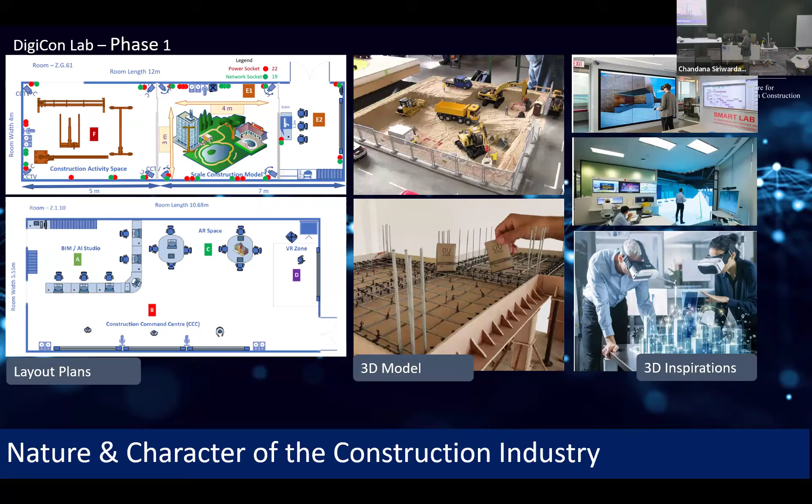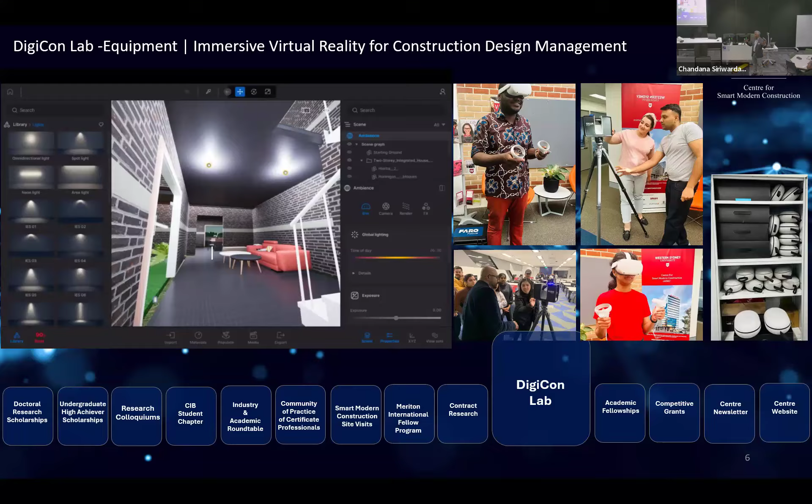Within the laboratory, we have virtual reality, image scanning using LiDAR scanners and other various scanners, photogrammetry, and various technologies that we use to capture construction-related images and then use that for training purposes, as well as use it for monitoring progress, integrating with building information modeling, and so on.

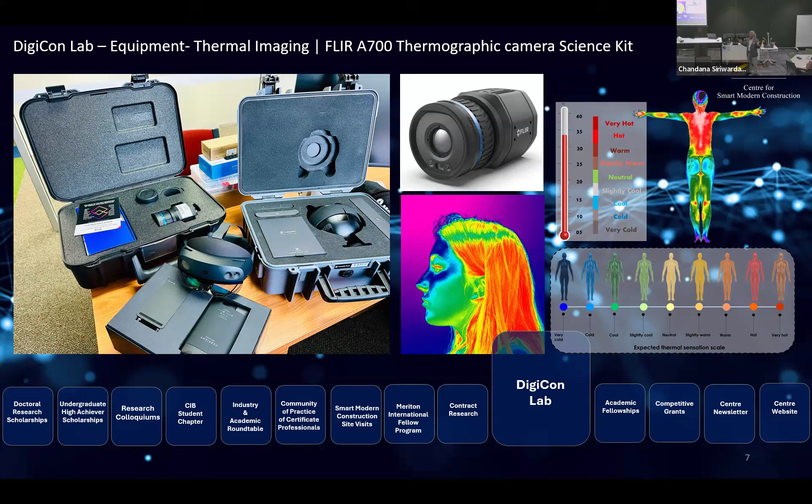We've got very sophisticated thermal image processing cameras, from which we are working on recognizing the thermal image conditions within common environments. There's a PhD project that we are working on, which I will briefly explain as we come along.

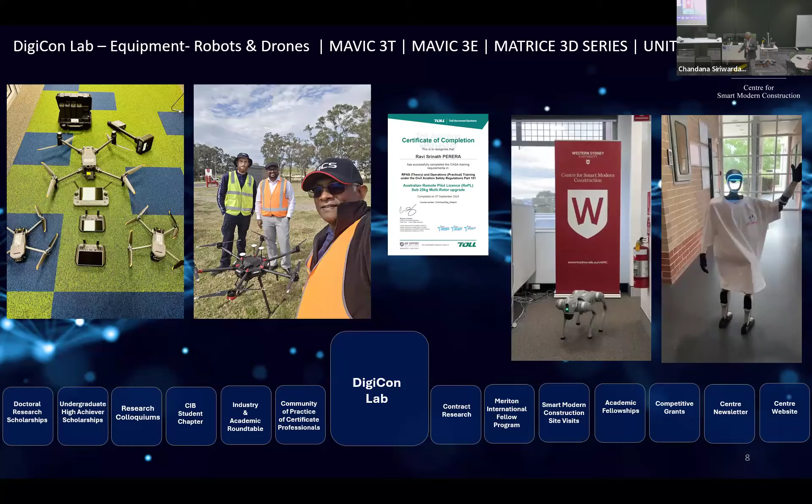These are some of our humanoid robots and the robot dogs that we have for these activities.

Coming on specifically to my pitch today about digitalization in construction, we need to understand what construction is, and why it is different. So this is what I would always talk about.

I start here. The construction sector has unique characteristics: size and complexity, we are massive in any country. It contributes 7 to 11% direct contribution to the economy. Likewise, the indirect impact is massive.

Construction, as opposed to manufacturing or many other industries, produces a product that stays where it is produced, in comparison to running in a production line. So it is constructed on site, one-off design. It's fragmented because there are many specializations involved due to the complexities involved.

And the ease of entry and exit to the construction sector is what we see. When construction booms, you see so many construction companies, and then the bust cycle comes in, you see many go bust and then out of the construction sector. So this cyclical nature comes because it's a low profit, high turnover industry comparatively to any other sector.

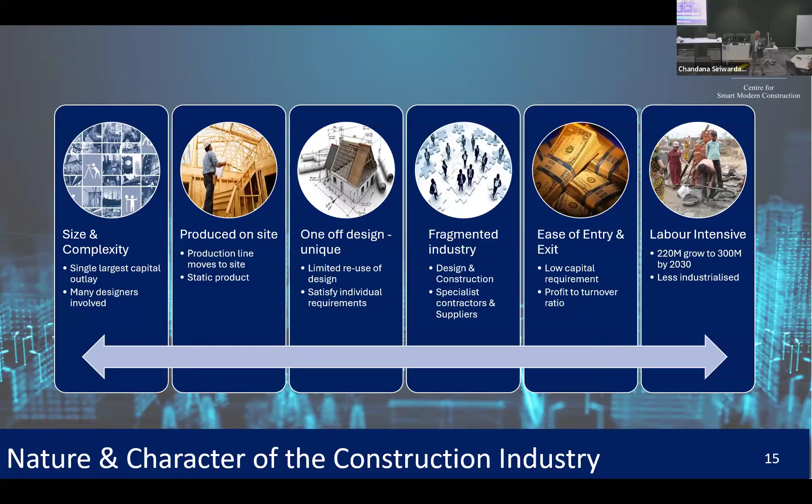It's because of these economic characteristics, and the low capital requirement for starting a construction company, that you see mushrooming of companies, and then again companies going into liquidation because of problems, supply chain issues, and the complexities involved, which we will explore as we go along. And it is a labor-intensive sector comparatively as well.

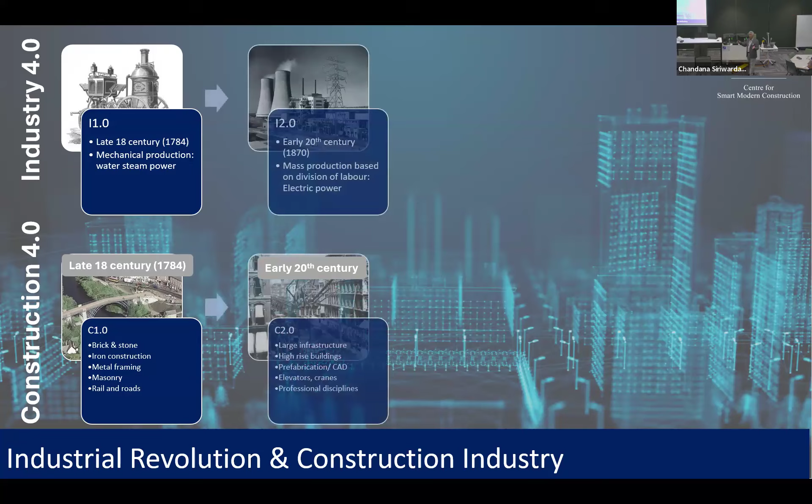So these are the things that make the sector unique, and therefore whatever we do has implications. Today we are looking at more digital aspects. For that, I need to take you through the industrial revolutions that have happened over the years.

So in the 1700s, we had the first industrial revolution with steam engines coming on board. And then we had the industrial revolution where electricity came about. And then, then we had in the early 70s the IT revolution.

When I started doing my PhD, which Chandana alluded to a little bit, I started in '93, finished in '97, and did a PhD on AI. So that's the time period.

AI started even 10, 15 years before I started. People only hear about it now, but it has a long history, and we have come to this level. Most of you have been using AI without knowing it. For example, smartphones, you have text prediction when you type - that's AI working underneath, but you didn't know it was AI, probably until now.

But the current AI generation comes about because of the large language models and the consequent generative AI coming on board, making it more publicly accessible, useful things like the GPTs that you can work with and that give you solutions.

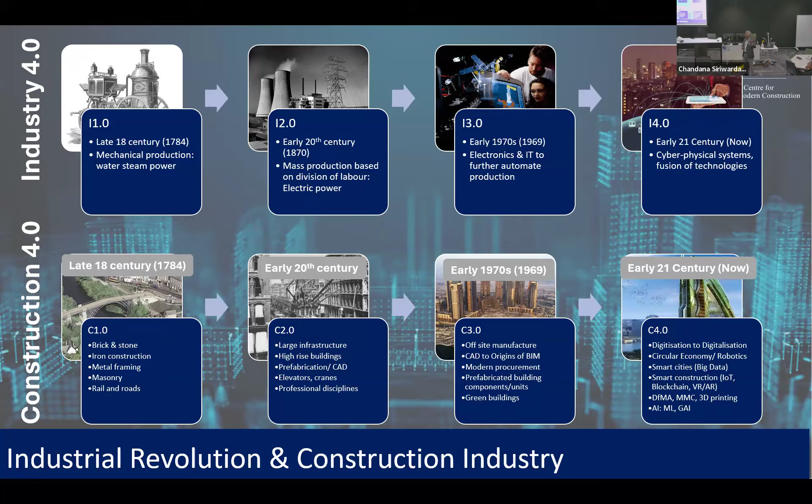And now we are about to enter the fifth industrial revolution as well. So what this means is the pace of technology development is rapidly advancing - it's an exponential curve. So things in the next 5 years will change dramatically. You have seen the advancement of smartphones and how that and the internet changed our lives. It would be 100 times faster than that with the AI advancements and so on that is happening.

So the construction sector is still the second least digitalized sector globally.

Construction is probably the second least digitalized sector, maybe the least now, since agriculture is digitalizing rapidly. So we have a lot to do. We identified that the construction sector has a policy deficiency.

Without policy impetus, you can't make the sector adopt digitalization. So we were funded by the Australian Public Policy Institute to come up with a digitalization policy framework, which resulted in this work. If you visit digicon.au, it's a live website, you'll see our work, and this is the resultant report. I have a few copies here to hand over, and there's a complementary policy-related report as well. That work identified how we can digitalize the construction sector and make it move faster in the digitalization process.

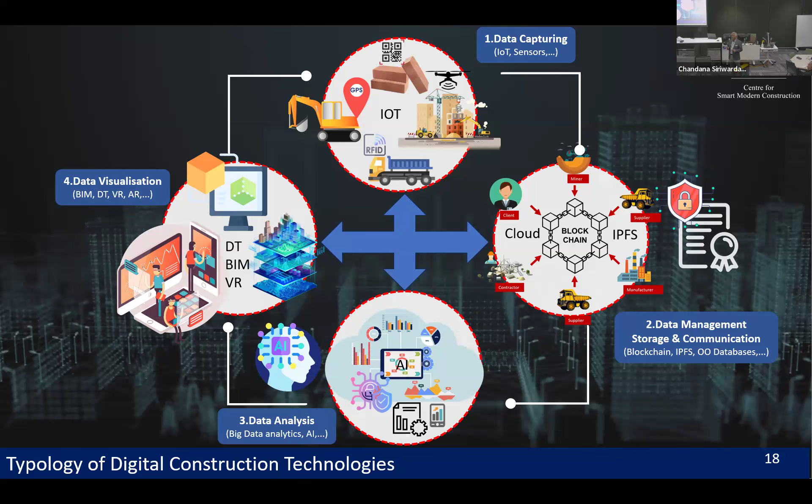Now, why I talked about this is that we do these type of outcomes or calculations. Embodied carbon - you probably know about carbon emissions - we need to know how much embodied carbon, operational carbon. We also work on embodied water as research. You may have heard about circular economy, and ESG calculations. In Australia now, companies over 50 million turnover have to report on ESG - reporting is mandatory for those companies. Carbon trading, EPDs, environmental product declarations - these are all important elements for sustainability.

Now, the point I was trying to make is all these estimates and predictions are based on static data. What do I mean by static data? Static data is data that you find in databases. And where do most of these data come from? Most of it originated at Bath University back in the 80s through a research project, and then it's been extrapolated, multiplied, and calculated from there, packaged into software, data books, and various other tools. It's all static data, and it's not accurate.

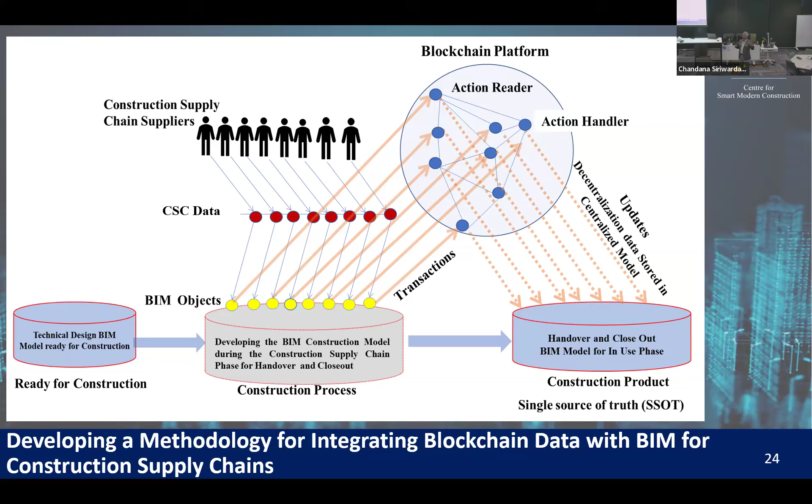This is a project we used for carbon estimating. As I mentioned earlier, we use blockchain to track carbon emissions. Now, this is real-time tracking, not based on database data. It is real-time emissions tracking through site data and getting that into the blockchain, and that will give us the actual emissions.

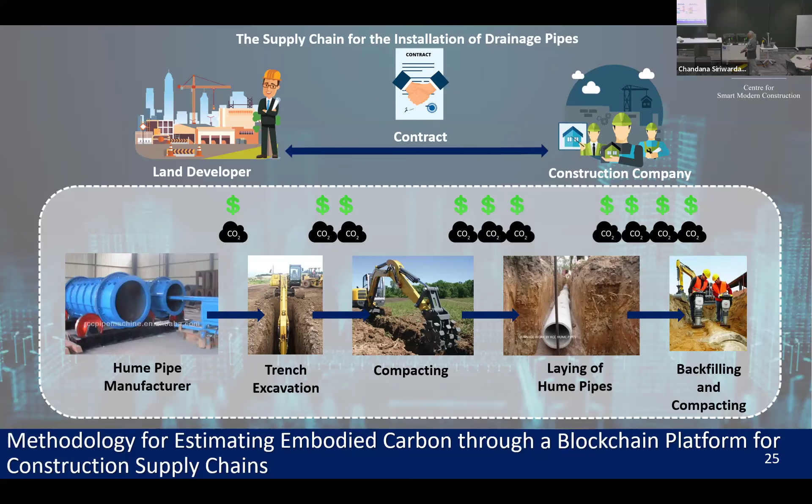This is another project where we're looking at embodied water. The concept of embodied water is the water used in construction, direct and indirect water usage. In the same way embodied carbon emissions are calculated, we can calculate embodied water usage.

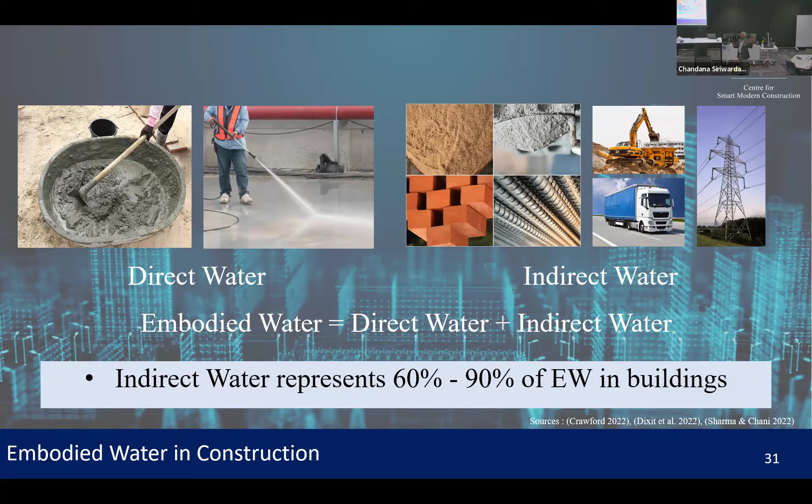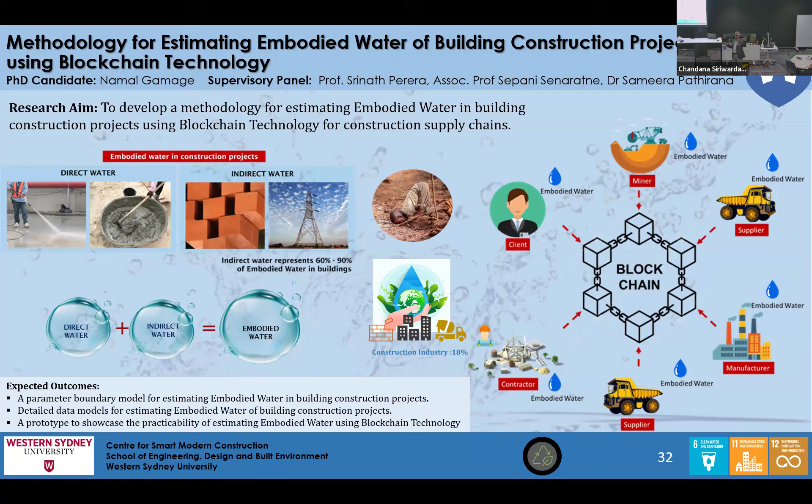Australia is a place where severe water shortages are there, and it's an important element for us to secure our water resources. That's something we are looking at here. That project uses, again, tracking transactions through blockchain and using that to estimate embodied water.

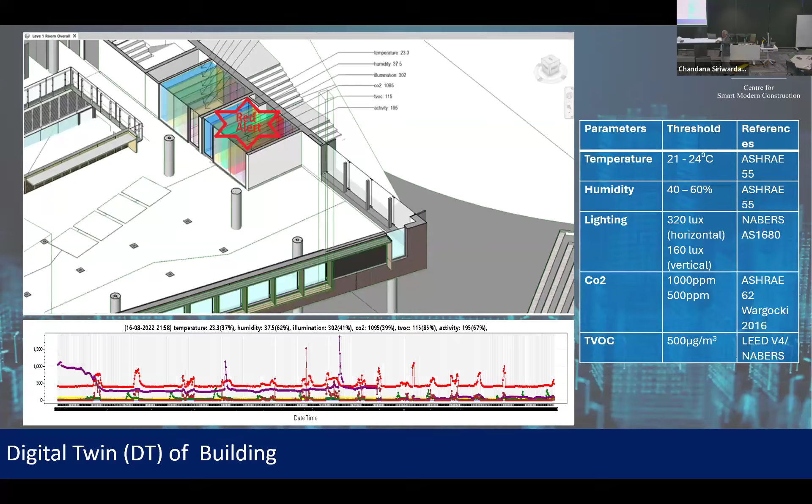In this project, we are looking at digital twin, basically integrating building information models with sensors to have a two-way digital twin, where things that change in the digital model are reflected in the physical model, and when various aspects of the physical model change, it is reflected back in the digital model.

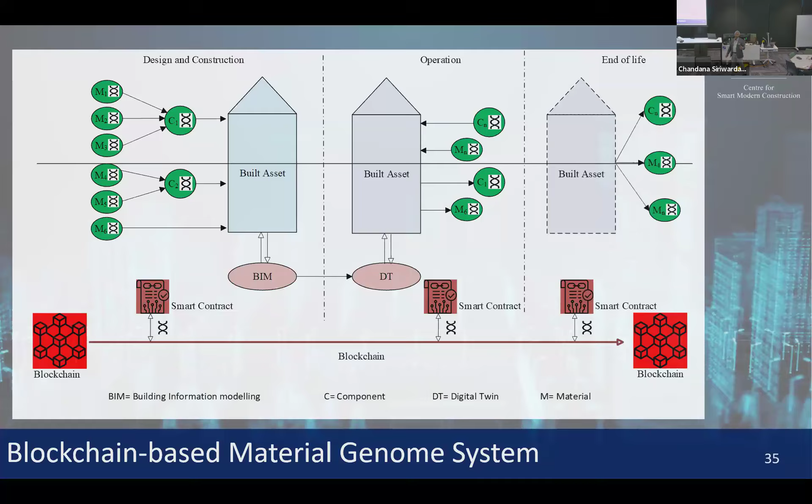We've created a carbon trading platform where carbon trading can happen. Any emissions that cannot be reduced will have to be traded, so that's where we are using carbon trading. That's the material passport project.

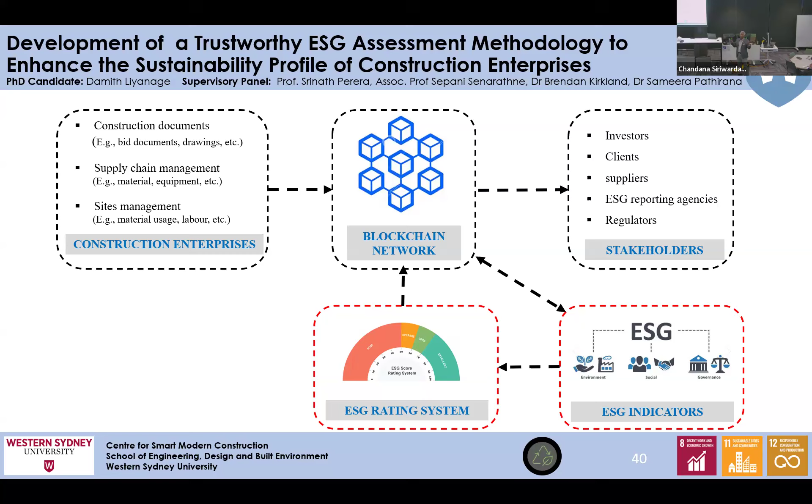Then in our other project, we are trying to capture ESG, environment, social, governance related data, and report it for construction companies. Again, we're using blockchain technology for that. We're also using these technologies.

This project is trying to see how, in a room like this, different people feel thermal comfort in different ways. It is because of various things. Somebody may feel cold, somebody may feel warm, and everything in between. How could you achieve optimum thermal comfort levels in rooms?

So we're using digital image capture to identify the thermal sensation of individuals and average it, using AI, to come up with a better thermal average for a particular room. So that's a more AI related project.

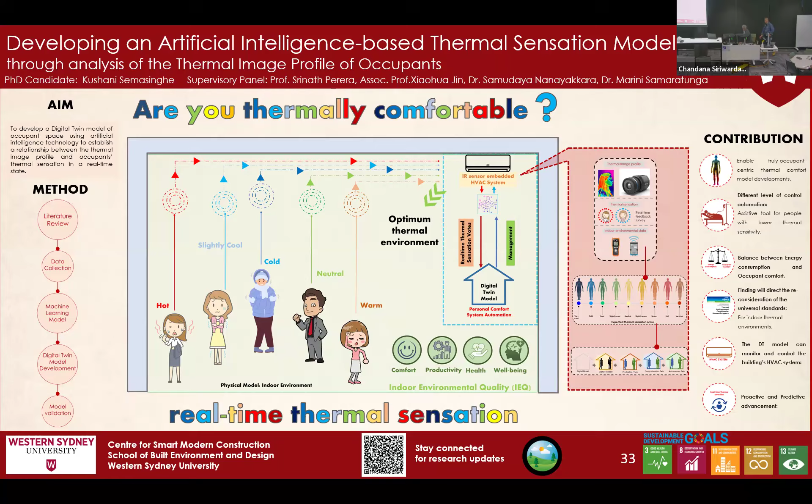So this is another AI project. This project is trying to avoid disputes proactively. So many communications happen in a project. If we can use the communication to predict the possibility of disputes and warn people about it, that will help us make sure there is intervention beforehand, and therefore prevent disputes happening.

So for this one, I have a small video to present if I have time. No? Yes. Okay. This one, right? Yeah.

Developing a dispute prediction digital system using machine learning. Conducted at the Center for Smart Modern Construction, Western Sydney University. Resolving disputes before they happen. Is it real or just hype? Let's take a closer look.

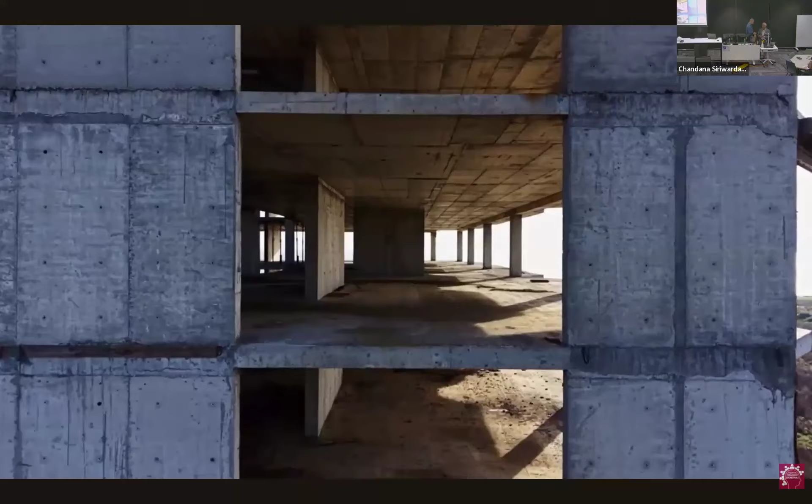The construction industry is under increasing pressure. Across the world, construction projects are experiencing significant cost overruns and prolonged delays. In severe cases, projects are abandoned and contractors become insolvent. One of the major reasons behind these challenges is disputes between parties to a contract. One construction dispute reached a value of $1.1 billion.

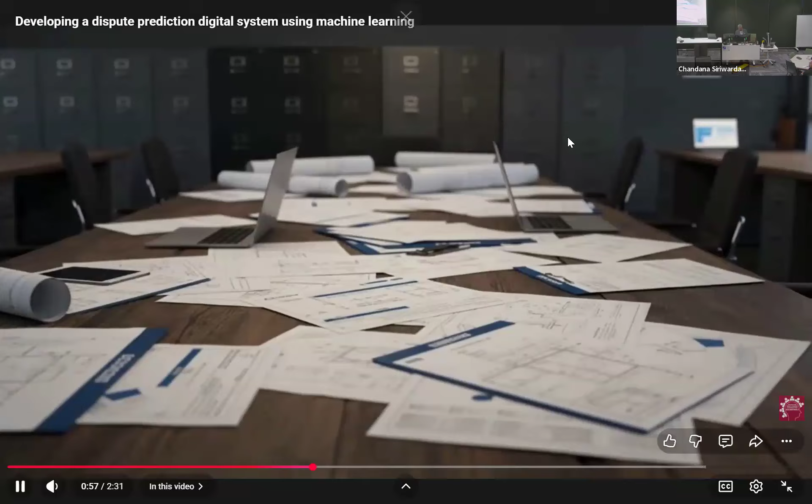Most of these disputes begin quietly in day-to-day information exchange between project parties. In practice, most construction disputes are closely associated with project documentation and formal communications. Documents such as emails, contracts, change orders, reports, meeting minutes, and site diaries often constitute the foundation of disagreements as they record cost and time entitlements, delay events, and daily site activities.

This study proposes an automated dispute prediction digital system that continuously scans your documents, your emails, your project communication, and warns you of potential disputes before you send them.

This is an email interface of a document management system integrated with dispute prediction models. As a project manager drafts an email about an overdue payment, the system automatically analyzes the content and provides a dispute alert before the message is sent. With one click, a dispute prediction report is generated.

The system shows a dispute index of 5, indicating a very high likelihood of dispute. This may lead to a payment and finance-related dispute, and key entities are also highlighted. Thus, the system alerts the construction professionals on the likelihood of dispute and the potential issues in the text before the project communications are exchanged. The results: reduced disputes, better business relationships, and successful projects at the end.

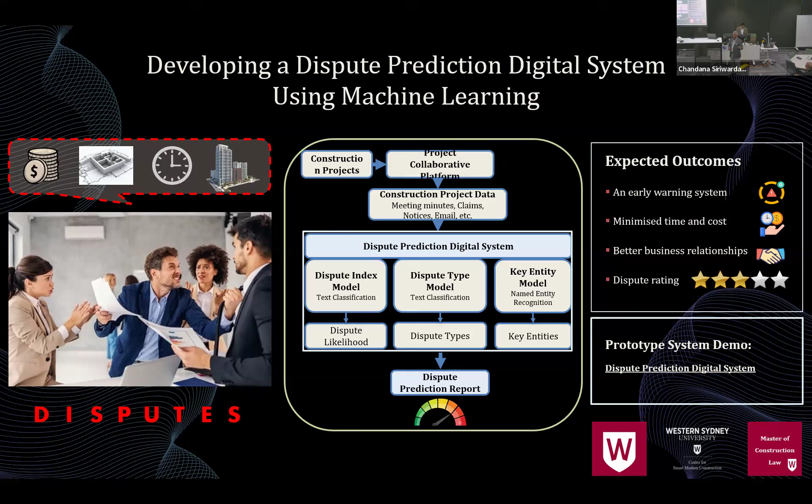So that basically gives you an understanding of how AI is being used. So we are using natural language processing, not the GPTs, but natural language processing algorithms to predict disputes. So we have an app. The app will capture all that information and prompt you when you're using emails about your communications and use of language. So then that helps in preventing disputes or warning about possibilities. And this can be used for minutes of meetings, project documentation, and all that.

So to conclude, just some of my publications that are involved, which we talk about most of these. Cost Studies of Buildings is, I shouldn't say myself, but it's quite a popular textbook in quantity surveying. Beginning of next year, we'll see the next edition of it. And then end of next year, we'll have the Contractual Procedures next edition coming in.

And the other book is basically a collaboration with Massey. So there's a few staff from Massey University who are leading that one. I'm a collaborator as well. Managing Information Technology Projects was another project that we brought about. This is our journal, which is a highly ranked journal in the construction and built environment area. So anyone interested, academics, you can use it as a publication avenue.

And finally, just wanted to give you a heads up about AUBEA 2026. In November, we are hosting the Australasian Universities Building Education Association's 49th conference at Western Sydney University, Parramatta campus. We'd like to invite you to come and join us, learn a bit more about what we do. It's an international conference where we're expecting over 200 participants, and you will have the opportunity to interact.

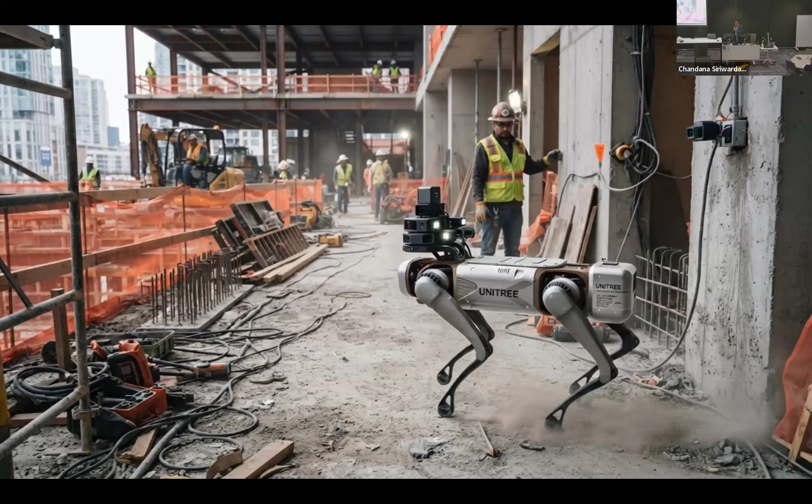There's a lot that we measure visually, right? So for instance, if you look at a construction site, you measure progress visually. You check for hazards visually. What else do you do visually? You do quality assurance visually. So there's a lot of visual information that we process, and we do that every single day in a construction site. And that's actually the best use case for platforms like this. Embodied artificial intelligence works best when you have that context, repeated processes. And so we just jumped the gun and purchased this robotic dog that we have at the moment.

But we know that it's not an easy step. So our team is looking at three things. We're looking at how to get the dog to autonomously navigate through the built environment, whether it's a construction site or a post-disaster scenario. We're also looking at the possible challenges and opportunities in actually deploying that in a construction site. It's a different thing just getting it to roam around a controlled site versus deploying it in a live site where you've got equipment and people moving around. And then we're also looking at prospective use cases, such as what I've explained before.

In addition to the visual sensing that the dog can offer, we can fit it with other sensors. So for instance, dust sensors, noise sensors, gas sensors. So you can imagine the possibilities. Chandana mentioned that we're not here to sell the robot, but right now we're exploring all these possibilities, and we're thankful to Massey University for supporting this first step.

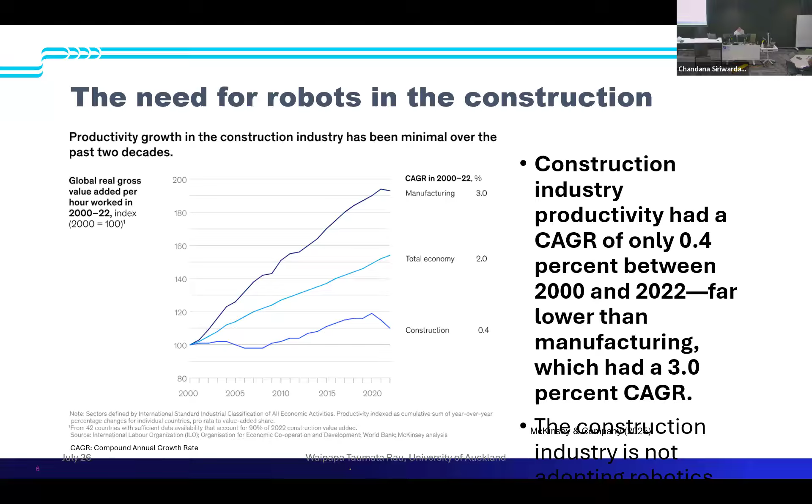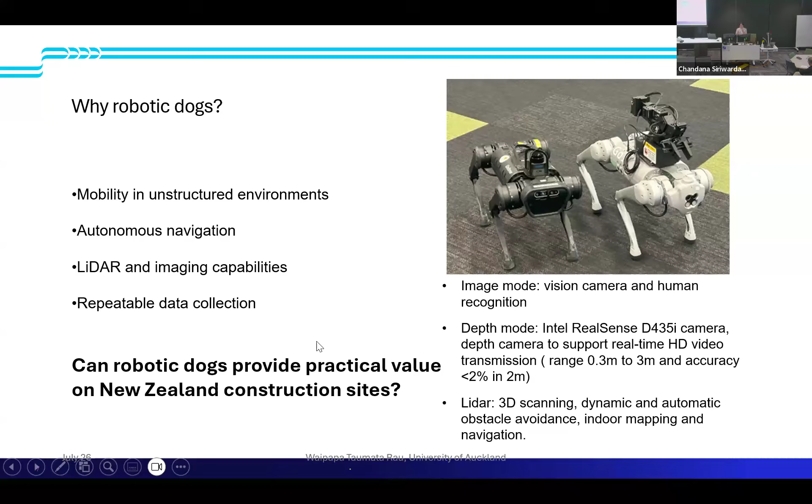So what it can do is that it can pick up things. It can remember what you have shown it before, and then it can copy it and do it again. So you can program it, right? And it has certain functions. I believe Napoleon and also Martin are gonna talk about what kind of technology it has later on. So I won't touch on this. So the next question will be, can robotic dogs provide practical value on New Zealand construction sites?

We've got industry people coming over saying they're quite interested in site monitoring digitalization. And from an academic point of view, we have our research needs: how do we get better, safer, and more consistent site data? After that, you need to design the research.

We have designed some assignments and also powerful projects for students. Since students will be the ones using those technologies, and know a little from classes, but in the end they'll use those technologies in the industry, we need to teach them. We also want them to touch and feel those different things, especially the robotic dog, and let them try them out. Then they'll feel, okay, I'm probably going to adopt that in the end.

Second thing: surveys and interviews on workforce or industry perceptions. What academic people think about it doesn't really mean industry people or construction workers think the same thing. So we need to collect their ideas or perspectives towards the new technologies. That's what we do. Next thing: technical validation of robotic dog data capture.

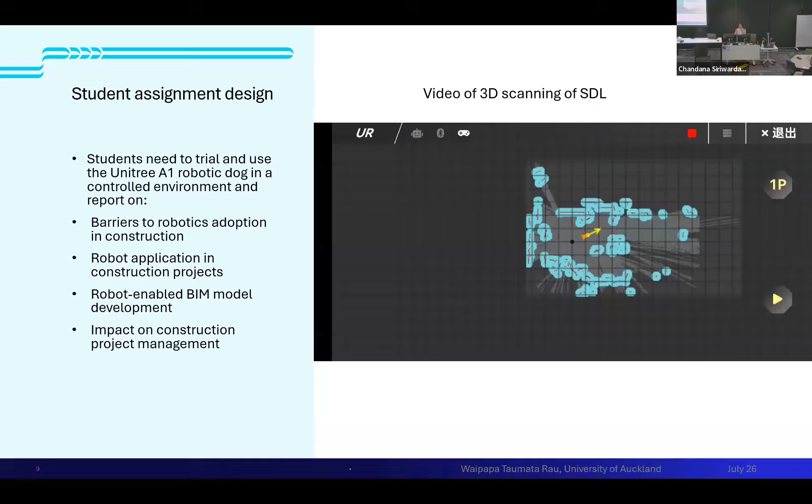I'm going to start this video. So what we need to do is not really to control the robotic dog to move backwards, forwards, left and right. The only thing I need to do is give it a direction, an arrow, and that's it. It can do the whole 3D scanning process by itself automatically. At the same time, it can also do autonomous obstacle avoidance, which means it can detect the surrounding environment in real time as it goes, and it will try to avoid any obstacles in front of it.

The Smart Digital Lab is a rectangular lab - that's the entrance, it should be a rectangular shape. It's not, because there are some students standing over there. We've also got a round table and some chairs around it. Here we have one student standing still all the time, and also another bicycle and a television over there.

I'm going to accelerate the whole process. You could probably see quite a lot of dots appeared and then disappeared - that's because some students really wanted to check if the autonomous obstacle avoidance is running.

So they want to see, for example, if I jump in front of the robotic dog, whether it can see me, recognize me, and try to avoid me or not. So it worked perfectly.

But because they are also master level students, they need to do research. So they also need to write a report on the barriers to robot adoption in construction, robot application in construction projects, and also robot-enabled BIM model development. I'm going to talk more about that in the next 2 slides. And also the impact on construction project management.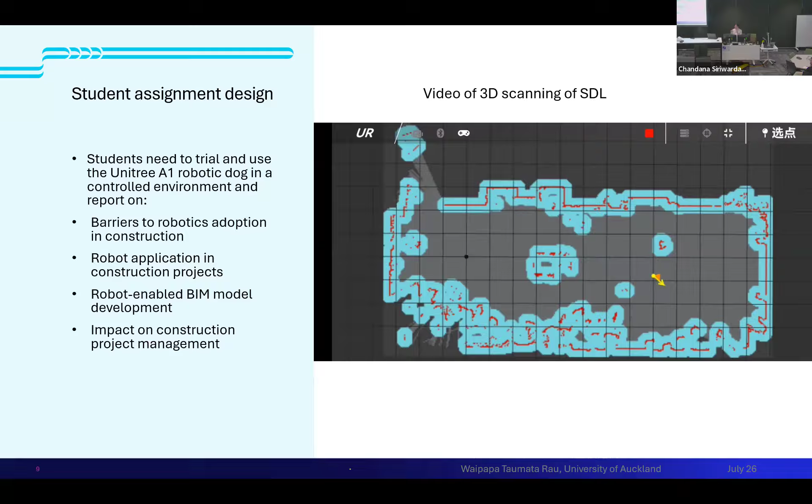So in the end, that's what we have got. That kind of project was done around 4 years ago, and we used the oldest version of the Unitree robotic dog. At that time, that whole video was shown actually on the app, and it's a pity that we can't extract data from it. We can only visualize the data. But because it's a 3D scanner, we know the results will be point clouds. So if we can get it out, that will be the input we can use later on, right?

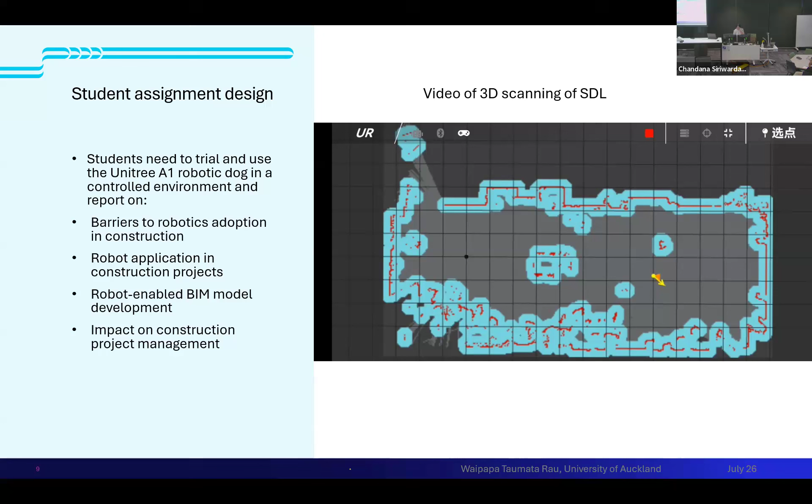Here is a case use for the automatic scan to BIM for indoor environments or indoor mapping for 3D scanner. I want to introduce the scan to BIM theory. I know some of you probably come from industry, you don't really know this quite well. But for the 3D scanner, we have different types, right? We have standalone ones, normally used, or a majority of you probably gonna use. But we also have got a handheld model. This one is extremely helpful if you use it under the table, if you think about it. And also mounted model, which means that 3D scanners are fixed on more like a stable kind of platform.

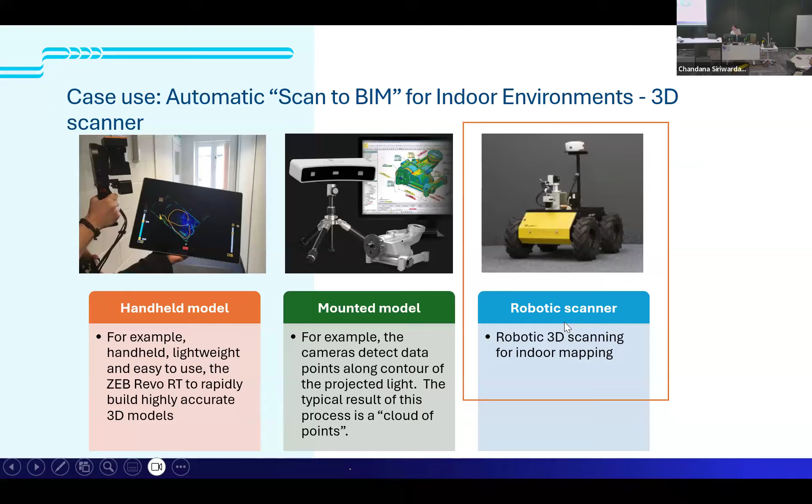But if you think about it, if we have got a robot with wheels or a robotic dog, so we can actually have the robotic scanner, right? And then how are we going to deal with that data?

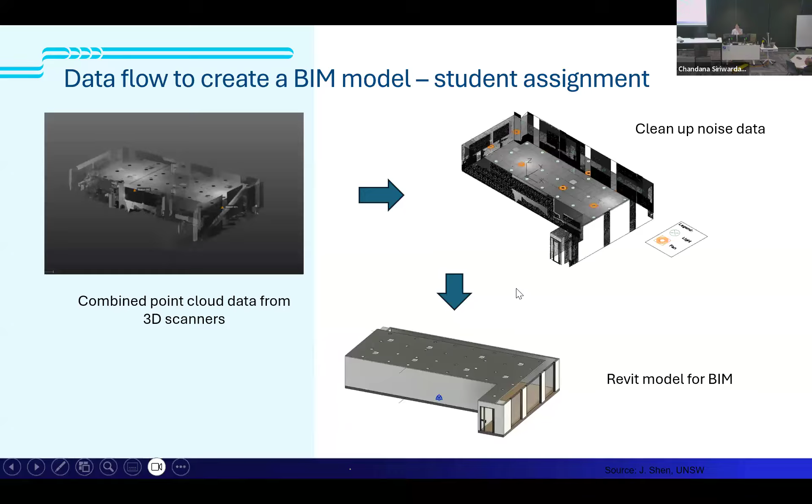We designed another assignment for the students. So if we do have 2 scanners or 2 robotic dogs, which can collect 2 sets of the point cloud data, then we can use some software to deal with it. For University of Auckland engineering students, we're lucky we have got the Trimble software. The Trimble people, they produce both the hardware and the software. So they produce both 3D scanners as well as the point cloud data executing software called Trimble RealWorks. The Trimble people have invested in the world's first Trimble technology lab at the University of Auckland, which means that all the university students, engineering students, can use this software for free. So they can actually combine those 2 different sets of point cloud data from the 2 3D scanners, and then they can clean up the noise data. Then they can form the Revit model, and that will be the input for the building information modeling. So that will complete the whole process.

Another one I want to talk about is the BRANZ-funded research, named de-risking the uptake of new technologies for effective change management. That was done by me, my PhD supervisor Alice John Richards, and also my colleague Jie. We worked with Victoria University of Wellington, and they have got a very big robotic arm in their lab. So they can do certain construction activities, for example, painting and also drilling, quite a lot of those. We also have got Callaghan Innovation people, Nick and Tim, come over. Thanks to Roy Davis for the lab coordination.

This is one of the case studies we have done before, taking the robotic dog to the construction site. This was done on September 8th, 2022 at the new Recreation Center of University of Auckland. It was the Hawkins construction site. So what we have done is demonstrate the Unitree A1 robotic dog in a more real-world environment on the real construction site. This is the first time we tried that on the real construction site for that dog. Also a questionnaire survey was designed to gather quantitative data and administered on site. We collected the workforce perceptions from 10 site workers from various roles. If you want to see the result, I can show you in the discussion panel.

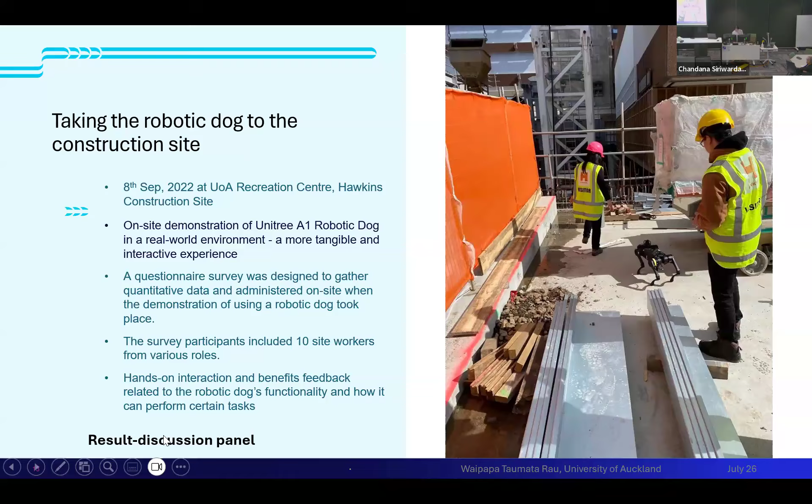I also supervised another group of students last year on the digital data collection infrastructure for construction progress monitoring. So the case study we did was to test and evaluate the effectiveness of the robotic dog data collection infrastructure for construction progress monitoring.

So what we did was use this robotic dog, the Go1. And I need to say that we have an agreement about it, so I can't really talk about the results they got, and I can't say which company it is, but I can describe what they have done.

They used to have a long stick. They hold one end of it, and on the other end they attached a device to capture videos and images. They put that device and level it at the same level as human eyes, so that it forms what a human is actually visualizing. The construction worker holds that steadily, enters every single room, turns around, then goes out and enters another one.

If you think about it that way, for construction progress monitoring, it takes a lot of time and also a lot of labor. It's not really cost effective.

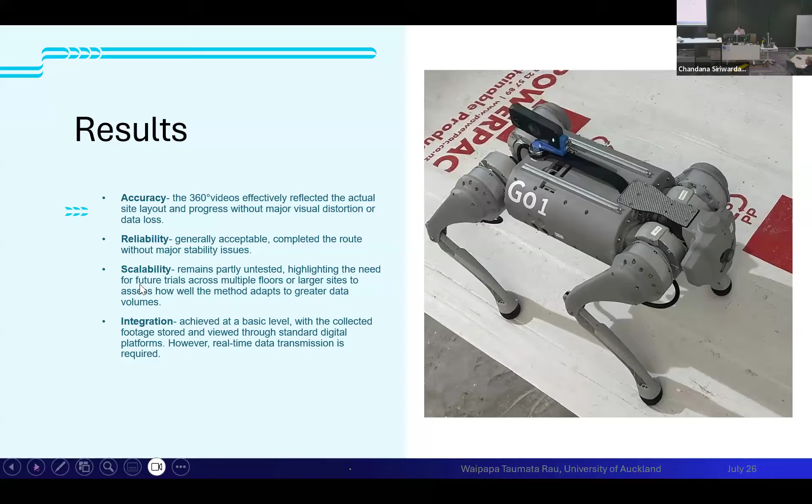So that is the results we got. And that's the references. Thank you very much.

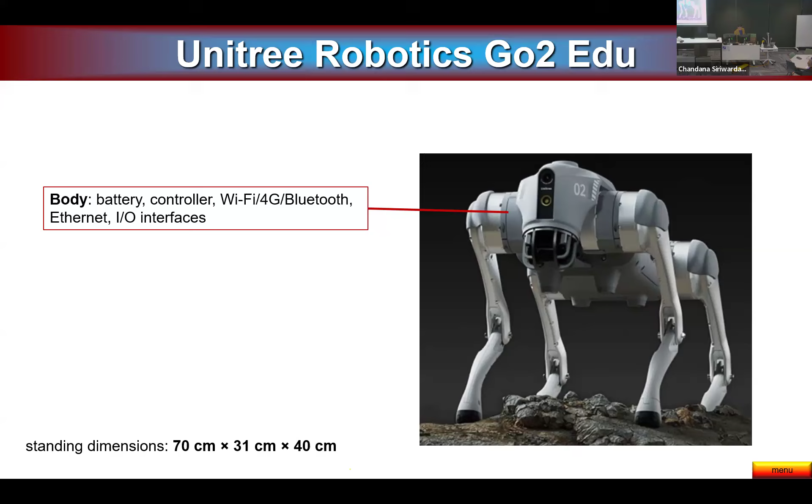Next, let's have a look at the head. You will find the perception sensors: LiDAR, RGB camera, lamp, microphone, speaker. And per leg, there are 3 actuated joints, and each of these legs has a foot sensor so the robot can detect whether it is in contact with the ground.

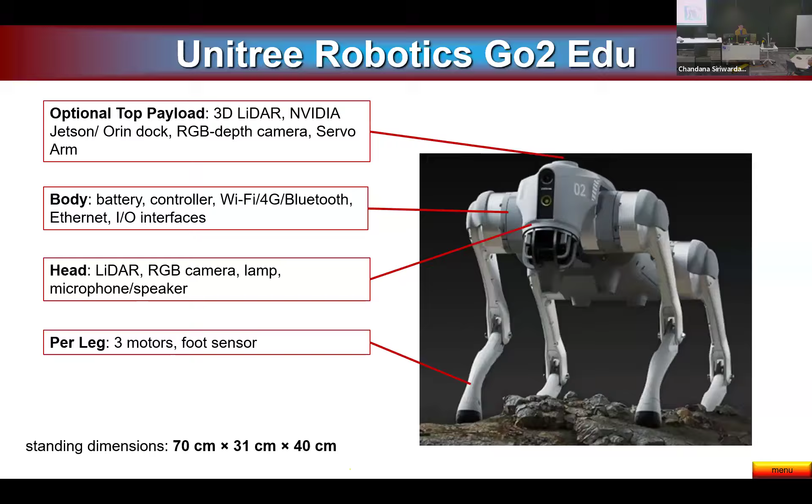Optionally, there's a top payload where you can install extra sensors, like a high-grade 3D LiDAR or a GPU for more powerful AI processing, an RGB depth camera, and a servo arm. Now I'd like to explain a little bit how this robot is able to sense the environment - later I'll show that we were able to successfully do so. It uses a LiDAR sensor that can be found right at the mouth of the robot.

This LiDAR emits laser pulses at a rate of about 20,000 pulses per second. And so these light pulses will eventually hit some objects. For instance, if it's hitting a wall, it's going to bounce off, and it's going to be detected by the receiver of that LiDAR. By measuring the time of flight, the robot will be able to work out what is the distance of that point from itself. And so we can generate X, Y, and Z coordinates, as well as the orientation of these points.

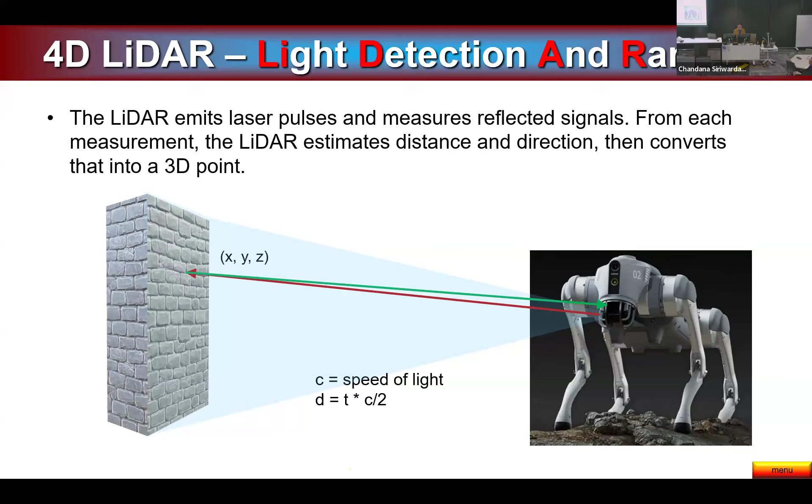By emitting thousands of these light pulses, eventually, the robot will be able to work out whether or not there's, let's say, a wall. So it can perceive what is going on with the environment solely by relying on this LiDAR sensor. LiDAR stands for light detection and ranging.

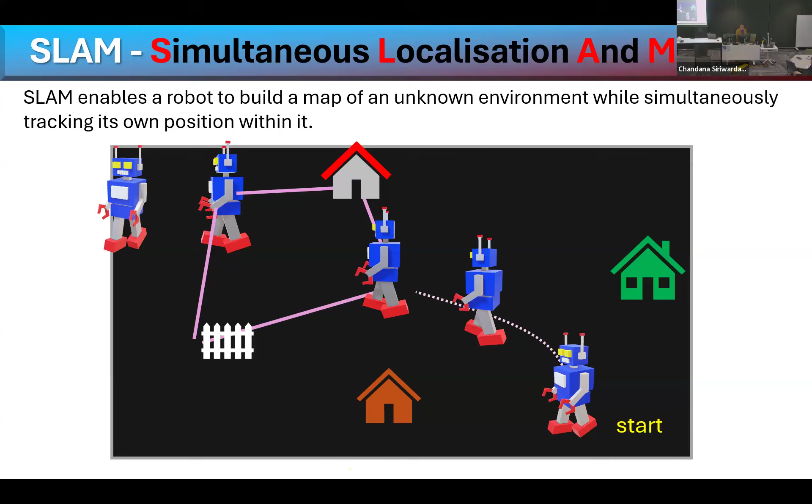Now, when a robot needs to operate in an unknown environment, how can it navigate safely if it doesn't know the map? So I'm going to provide a short introduction, just at least an overview of one of the main algorithms used. This is called SLAM for short. This is very famous among engineering practitioners. It stands for simultaneous localization and mapping. That means the robot can generate a map as it traverses the exploratory world. And it can also work out the location of the robot as well as its orientation within that system of coordinates.

Now I'm going to define another term. When we say mapping, what do we mean by mapping? Let's have a look at the following scenario. Let's say you're walking along the street and you would like to build a map. And all that you have is, let's say, your phone, and you want to locate where you are in that map. So you can use the GPS within your phone. And if you see, let's say, an orange house on the left and a green house on the right, then you can jot down some notes in your map based on the location of your robot within that map.

As you progress, let's say you turn to the left and you find more objects, let's say a house with a red roof on the right and a white fence on the left, then you can keep on recording all this information. So the robot will make use of its memory. It can do so in real time, and eventually, after traversing all the possible space within that exploratory world, it's going to end up with a map.

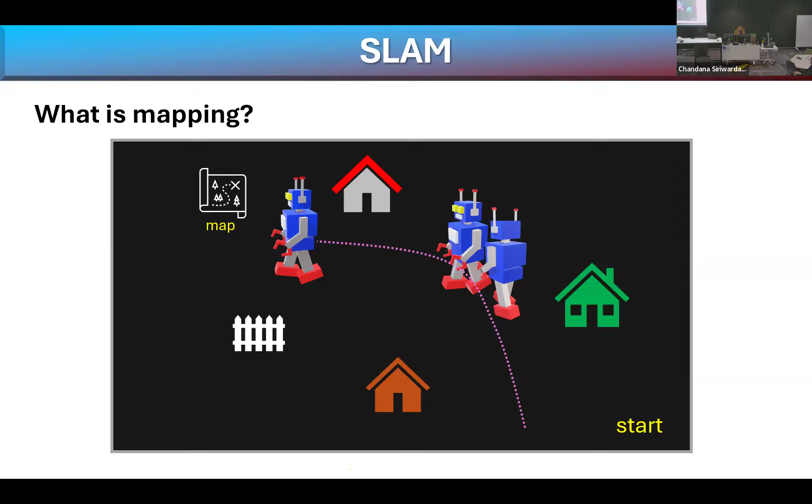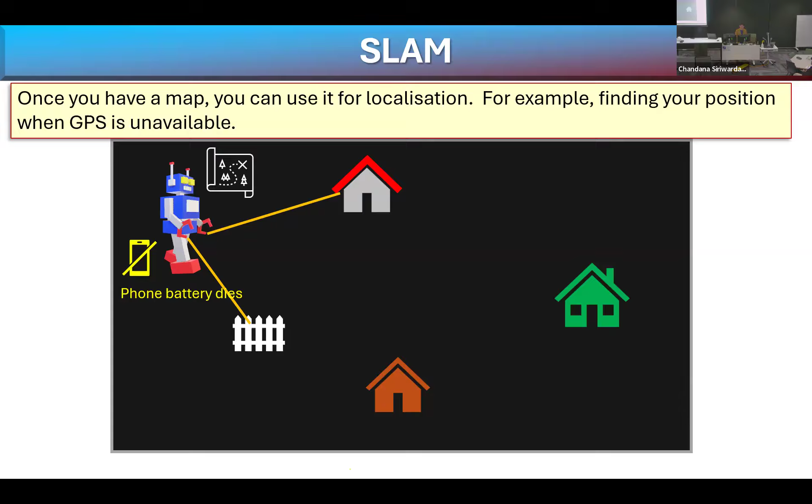Now, once you have that map, this robot can then make use of that map for localization. So for instance, let's just say that the phone battery dies and so there's no more GPS. The robot can then make use of other perception sensors, like for instance, the LiDAR that I showed earlier. The LiDAR will give the robot an estimate of the distance of the objects within its field of view, as well as the orientation of these objects. So we have the house with the red roof further on the right and the white fence on the left. Then the robot can compare these landmarks with the map that it has and then work out where it is in that map. So this is what we call localization.

Now, apart from localization, navigation is also another important task for the robot. Localization is not navigation. Navigation means computing, for instance, an optimal path to a goal, to a target destination. So given the robot's current position, it should be able to work out what is the best way to get to, let's say, the orange house.

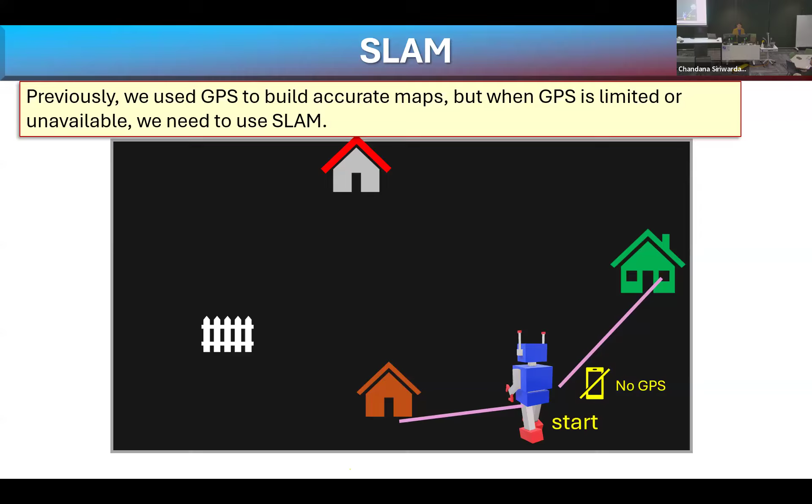So earlier we saw that having a GPS is essential for building a map, but this robot here doesn't have a GPS. And a GPS will only work if you're outdoors. But we want to be able to make the robot work indoors. And this is when the algorithm SLAM comes into play. So no GPS, but using the LiDAR sensor, the robot will be able to compute the distances between itself and the objects around it within its field of view. So let's say orange house on the left, green house on the right. It can compute the distance as well as the orientation.

Now, as the robot moves, it can also record the number of steps or the stride that it takes. In engineering terminology, this is what we call the odometry. The robot can keep track of the number of moves, the motion that it has generated, and it can combine the inputs coming from the LiDAR, that means the distances and orientation, as well as the odometry to work out where it is in this map. And while the robot is traversing the environment, it's going to keep on tracking all these landmarks that it has seen previously.

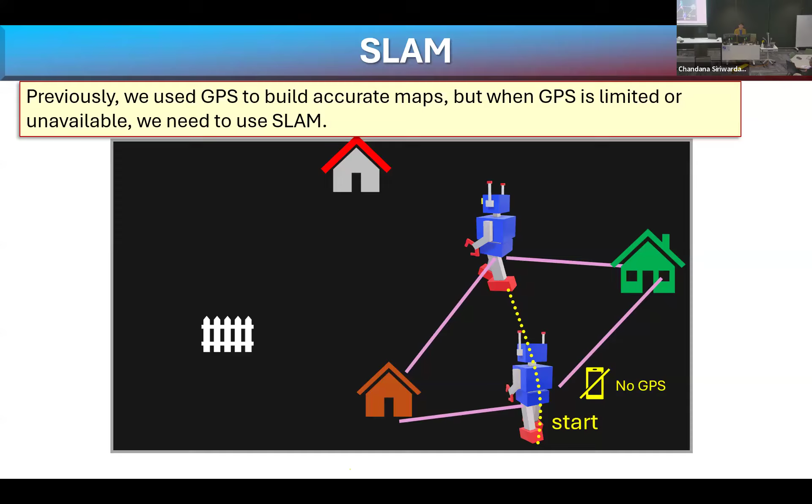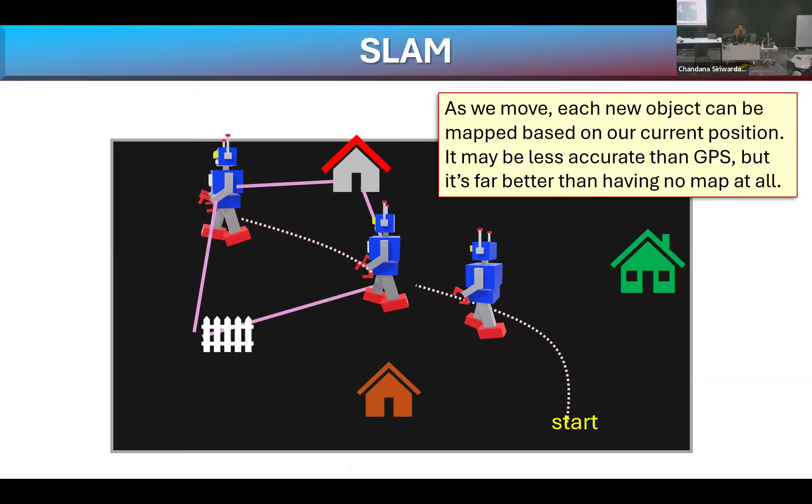And so it will know if at some point in time it finds new objects in that exploratory world, it's going to be able to know where those objects are relative to itself and relative to its starting position. So this is all the technology that we use in plain layman's terms. And we will see that it actually works, okay?

I'm going to describe now the actual system. So this works in real time. We can collect data, feed the data to a remote computer, do any processing we want, and also navigate the robot autonomously. So I'm going to describe first what system we have. We're making use of multiple sensory information. The LiDAR, for instance, will be returning what we call point clouds, 3D point clouds.

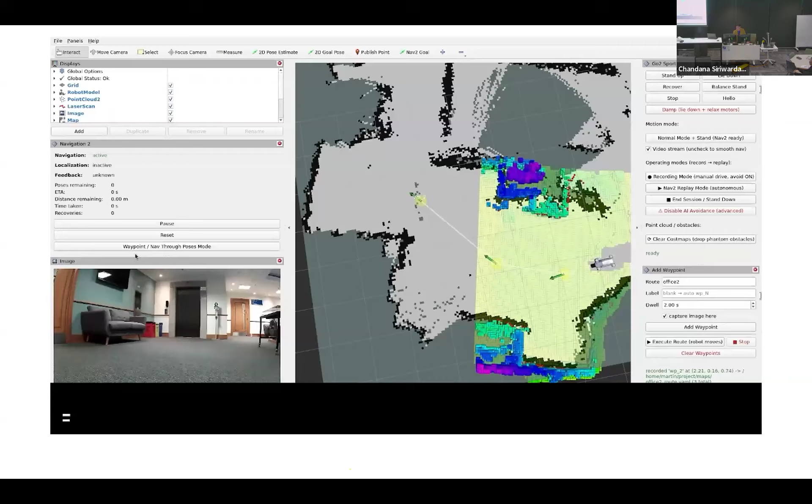So now that we know what's going on, we can run the demonstration. We did some experiments, and I'm going to just run my video here because there's a lot going on. We just did this a few weeks ago. Initially, the robot is given an approximate map of the environment and placed at a designated start node. It then performs SLAM localization by matching map boundaries with point cloud data continuously collected from its LiDAR sensor.

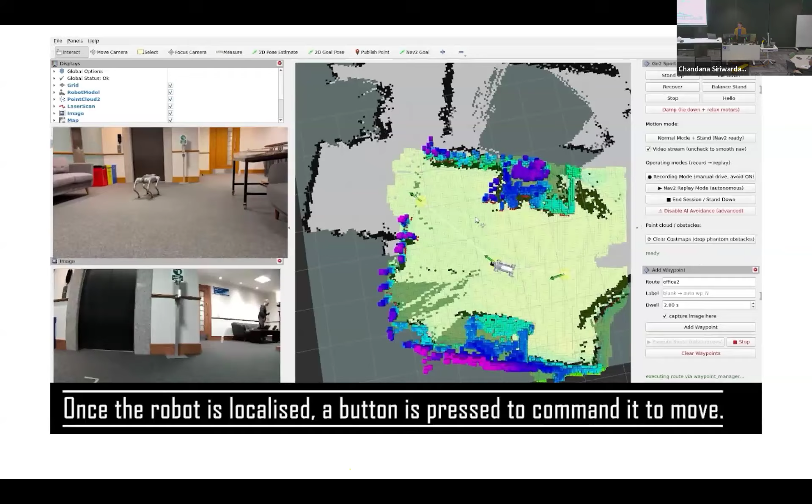As shown, the multicolored points approximately align with the walls and surrounding furniture within the LiDAR's sensory range, indicated by the yellow region. Once the robot is localized, a button is pressed to command it to move. As it navigates, the robot successfully follows the waypoints one by one, progressing toward the goal, which is represented by the white water bottle. As can be observed, the robot continuously progresses towards the white water bottle until it arrives there.

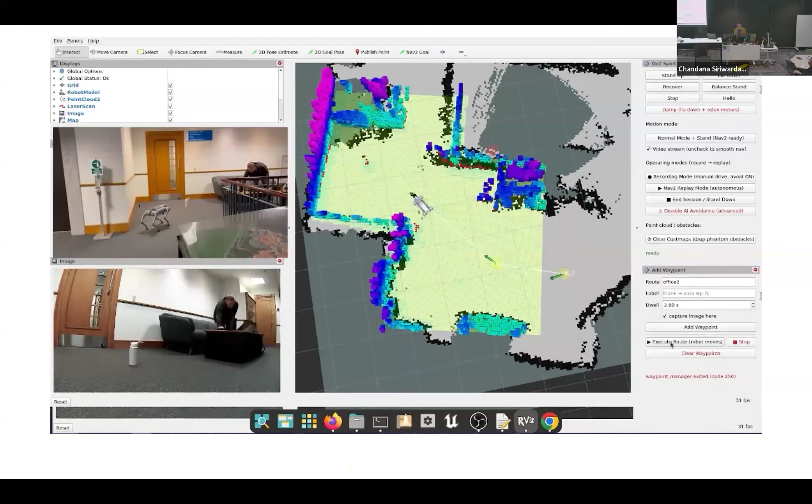This experiment requires careful calibration for a balanced gait, along with point cloud cropping, noise filtering, and range filtering before using SLAM or Nav2 for navigation. Achieving this performance required multiple rounds of experimentation and code refinement. In the second test, the robot is instructed to move directly towards waypoint 0, which represents the origin point. As shown, the robot first turns around and then moves towards waypoint 0.

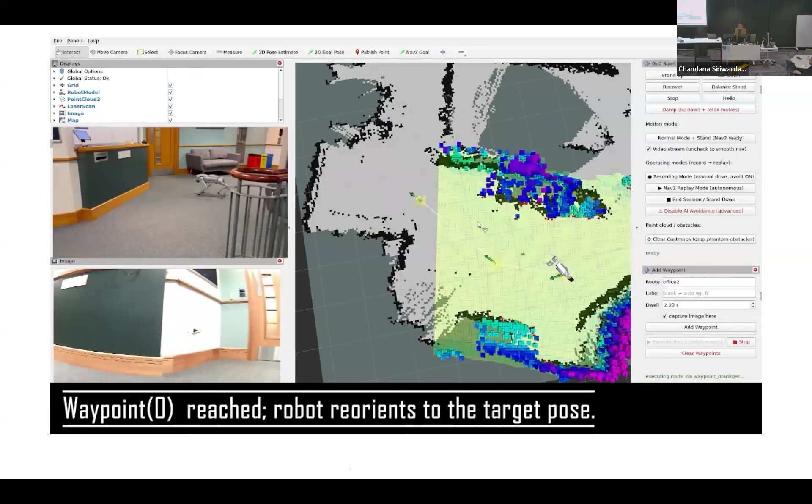For global path planning, the robot uses Nav2's SMAC Planner 2D, which is based on the A-star algorithm. For local path following and obstacle avoidance, it uses the regulated pure pursuit algorithm. As can be seen, the robot eventually reaches waypoint 0 and then reorients itself according to the target pose.

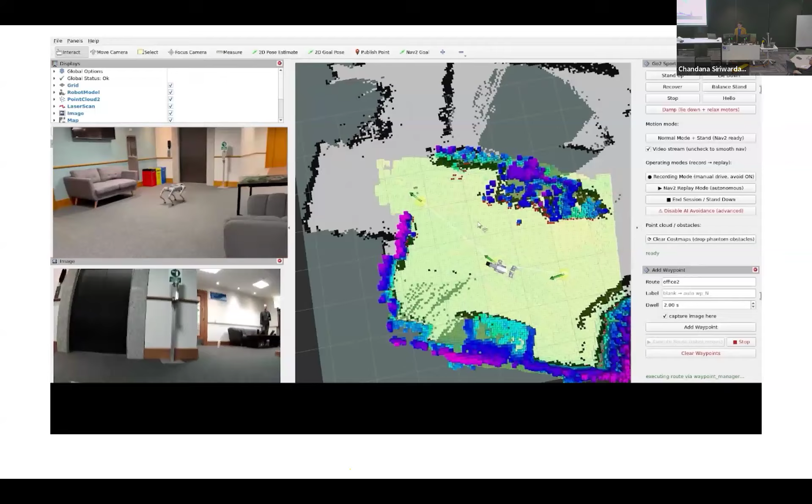To further test the robustness of the navigation system, we instruct the robot one final time to follow the waypoints towards the water bottle. As depicted by the progressing yellow dots, we can see that the robot engages its LiDAR sensor to scan the environment for obstacles as it navigates. Eventually, the robot successfully completes the task again.

Maybe I should mention that out of the box, the robot comes with a remote, a wireless joystick controller, and it comes with some pre-programmed robot actions. So with the push of a button, you can make the robot dance, you can make the robot jump, and so on and so forth.

But for real-world applications, like disaster response, search and rescue, industrial inspection, you really need to come up with a task-oriented, automated implementation of a process, and that requires programming, and as we can see here, a lot of experimentation as well as AI technologies.

And for this application, we are using a combination of optimal path planning, a global path planner, as well as a local path planner. And these tasks are crucial for many practical applications. So this is just scratching the surface. We've just begun.

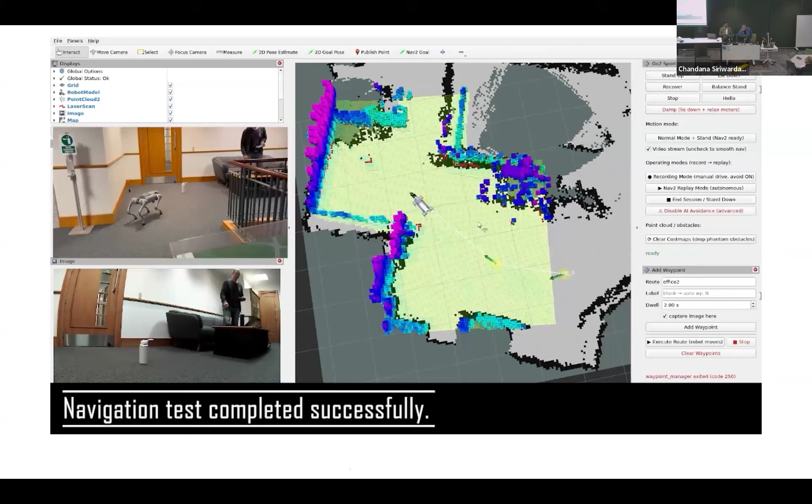And the next presenter is very important in the New Zealand context, because WorkSafe New Zealand is the regulator, and they are setting the policies and boundaries for how to have a proper healthy and safe working environment for construction workers, as well as regulations for the industry to follow. And without taking much time, I would like to invite Jason John and Madan Chow from WorkSafe New Zealand

to talk about the policies and regulations around the construction industry, because if we try to introduce robotics or robotic dogs or humanoid robots or whatever, we are adding another layer of complications. Maybe we are adding another series of hazards to the industry. So how can we navigate that? Jason will talk about the New Zealand context and their boundaries. And one point Prof. Srinath mentioned is policy deficiencies. So how can we fill that gap? Over to you, Jason.

Thank you, Dr. Chandana. Kia ora, everyone. My name's Jason John. I'm an area manager from WorkSafe New Zealand, New Zealand's health and safety regulator. Tonight I'm just going to give you a very quick overview of New Zealand's health and safety regulations as they currently sit. It's at a very high level, a very brief overview.

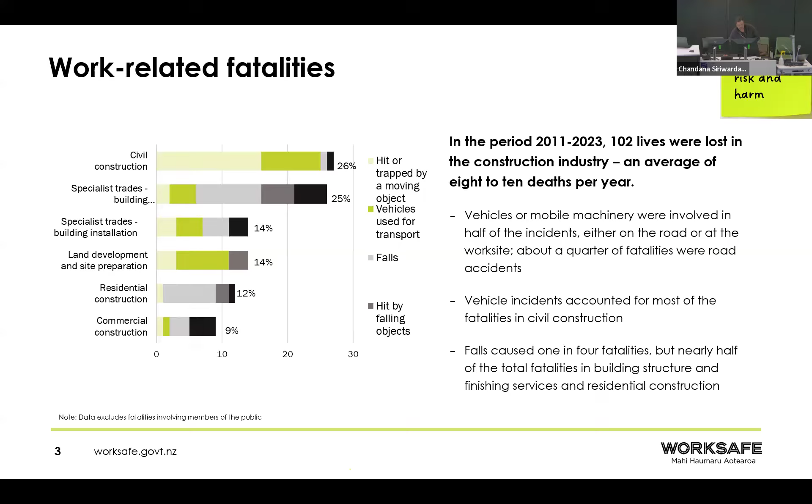All right, I really want to start off with a real life situation. So health and safety, what is it really about? It's about people, right? Construction still relies heavily, and will for some time, on manual labour, people out there working with tools. In this situation, this is a builder that had been working in the sector for about 40 years. He had never had an incident a day in his life, worked really hard building up his business, working on sites.

Now, he may have been working perfectly fine for several hours, maybe even a couple of days with that sort of situation. But unfortunately for him, while he was up on that scaffold, he received a phone call from a client, creating a bit of a distraction. He took one step backwards off that plank without realising it. It changed his life. It not only changed his life, it changed his work colleagues' lives and his family's lives and those people in the communities that obviously rely on him.

Okay. Fortunately for this gentleman, he did survive, although he had to be revived by the ambulance service on his way into hospital. He was also very fortunate that at the time of the accident, unfortunately, he was working alone, but fortunately for him, a police patrol car was actually passing by, and the officers actually noticed him lying on the ground.

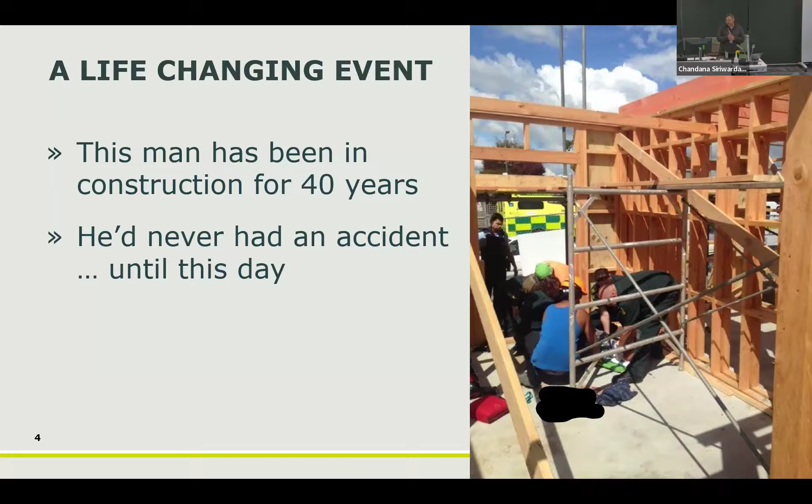So now moving into the legislation. What we're still encountering with a lot of businesses is a lack of understanding of what the legislation really means. As it currently stands, the legislation is actually pretty good in that it gives a lot of flexibility with industries and businesses in how they manage health and safety.

What a lot of people don't realise is that everyone has a role to play when it comes to health and safety, right? It doesn't matter whether you're the worker doing the high-risk activity, the business, or a designer or a supplier, right? You have responsibilities under health and safety in New Zealand, and you also cannot contract out of health and safety in New Zealand, right?

So quite often, when we do come across incidents that we're investigating or even an assessment, we do see contracts where people are trying to contract out of their health and safety. While it's important to identify and work with people, it's also important to identify who's responsible for managing health and safety and specific tasks, those high-risk tasks.

So at the very top of basically the pyramid in terms of responsibility, the business has the ultimate responsibility around health and safety. The role of the business is to ensure that it has effective systems to manage health and safety risks. Okay, so that's the business. If you think of a registered company, Bob the Builder Limited, for example, they're the business.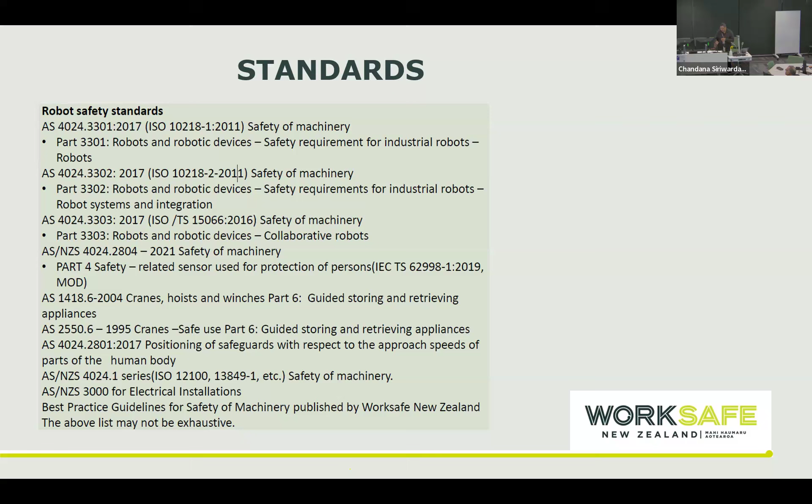Okay, so that moves me on to probably the last part now. So one of the things that looks like is definitely changing in the legislation is what's been called safe harbour. So approved codes of practice are being developed or looking to be developed through industry, obviously with support from WorkSafe New Zealand. So one of the things that you may need to start thinking about, I think, as a sector, is maybe looking at some sorts of approved codes of practice in terms of how to use robotics in the construction industry and what standards you would expect to be met as part of that. Okay.